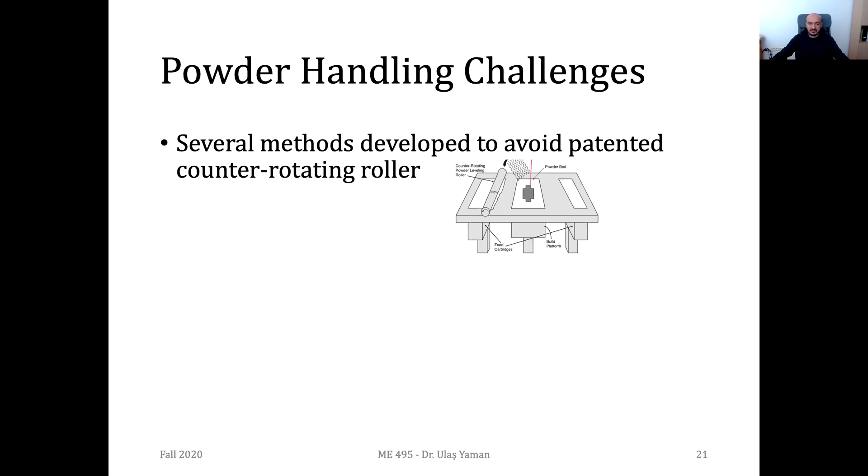What are the requirements from these powder delivery systems? First of all, you need a reservoir, a kind of powder tank, which has sufficient volume. Can anyone tell me the requirement for that? Any relation between the volumes? If you have two feed cartridges here and the build platform, what is the relation between the volumes of these regions, these parts?

If we add the cartridges together, it should be equal to the powder bed, I think. Yep, that's the main thing. If you have a volume of powder bed, then you need to have that material volume in these cartridges. If you have two of them, you may have half of it here, half on the right hand side. This is the main simple requirement for the reservoir, since in the maximum case, your part may fill the complete building bed.

Another requirement about delivery systems is the correct amount of powder on the layers. This is highly important since if you have incorrect amount of powder on the layer, then your laser will not be able to do the sintering.

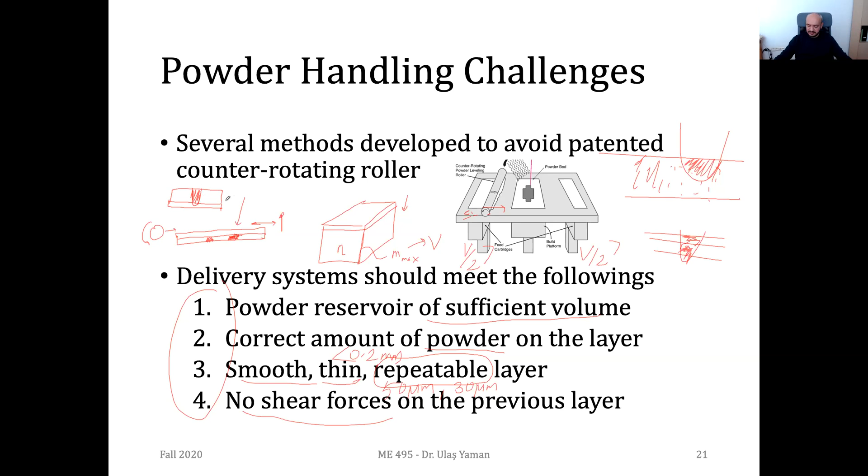But as I mentioned, due to quality and stability problems, most manufacturing companies do not let users play with these layer thicknesses or other laser power issues. Any other questions, guys?

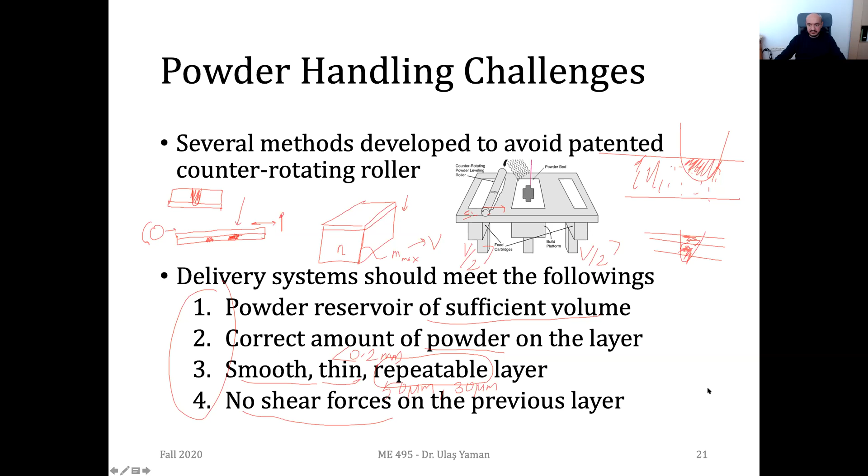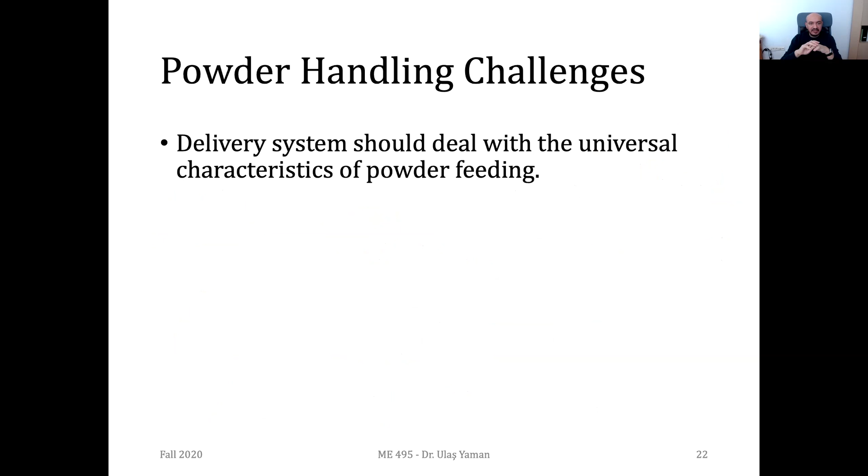Yes, what are the challenges? We have some challenges. Obviously this is not an easy task - you need to be careful while spreading these powders uniformly, and your system should satisfy these requirements. Also, some universal characteristics of the powder feeding system should be considered.

For instance, if you have smaller particles, as the size of your particle decreases, think about flour, okay? If you have smaller particles, then you'll have more friction, more interparticle friction between the powders, and there will be more electrostatic forces, and these will result in a decrease in flowability. So we have an advantage of smaller powders, since if you use smaller powders, your accuracy and resolution will be much better.

You can fabricate highly detailed products. But the thing is, while spreading the powder you may have problems, since the flowability of smaller size particles is very low, due to the fact that we have more friction between them and more electrostatic forces. So we need to find an optimum value for the particle size and try to avoid such problems.

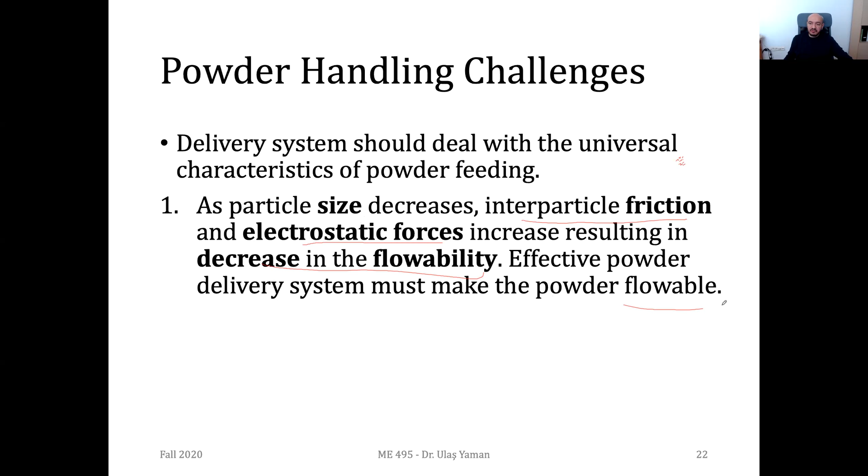So in summary, you need to have flowable powders. Another thing is, if you have more surface area according to the volume, and this ratio is high, then our surface energy will be increased, and the powders will be more reactive, which means we may have some chemical reactions that might result in worse quality. So you need to take care of it.

Sometimes, in order to overcome this issue, we have a controlled atmosphere. We will see in upcoming slides that some especially metal-based systems use such vacuum systems - the interior of the machine is in vacuum, and we don't have any gases around. Or sometimes we use inert gases instead of a vacuum atmosphere, pumping inert gases into the machine so that we will not have any reaction between the powders, the laser beams, and the powder itself.

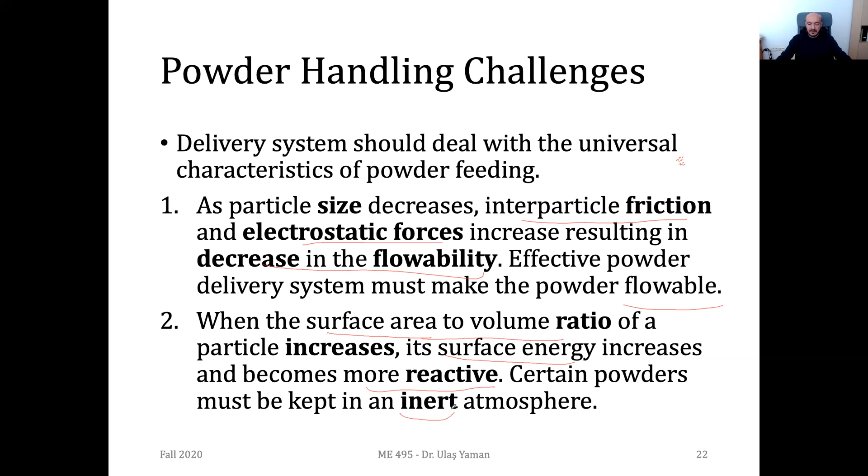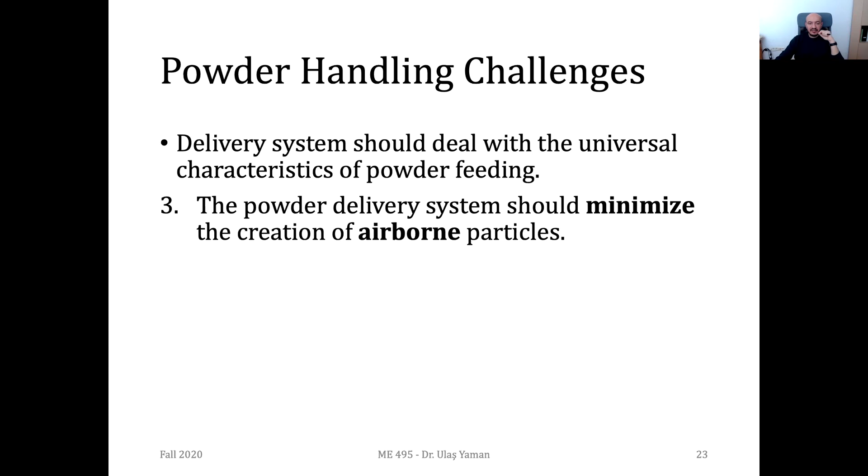Another issue: your system should be capable of minimizing airborne particles. We shouldn't have any particles moving around, so you should clearly spread the powder without moving any powders around. That's another requirement. Lastly, if you have smaller particle sizes, your surface quality will be better, your accuracy will be higher, and you will have thinner layers, which means the staircase effect will be somehow eliminated. You cannot completely eliminate it, but it will be quite difficult to see on inclined planes.

In summary, you should try to use minimum size particles while overcoming the negative effects of such powder systems. This is a quite challenging problem. You should always do some kind of tests on your material and try to find the optimum size for your powder bed fusion system. Any questions on these powder handling challenges?

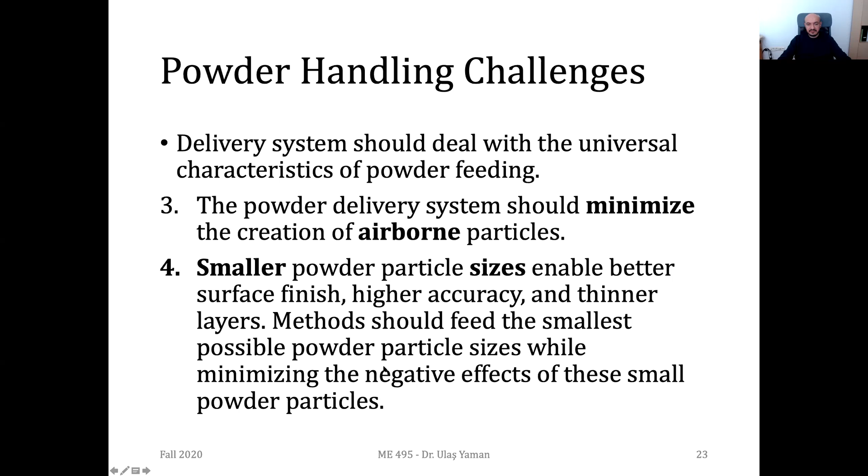So with our powder handling system, we have a counter-rotating roller and feed cartridges. These feed cartridges move upwards and provide extra powder around. Then with the help of this counter-rotating roller, we spread them on this table uniformly. Let me draw the side view. We try to have a uniform amount of powder on the bed all the time.

We always have some powders around this bed, right? We cannot eliminate it. Sometimes you may have a kind of gap, and these extra powders might be stored in recycling units. Once this roller is on the right-hand side—it will be difficult for me to draw, but let's try—once it's on the right-hand side, this one will move up. We will have extra powder, and then by simply moving our counter-rotating roller to the left-hand side, we will spread the powder. This is for decreasing the fabrication time.

You may have a single cartridge, but that will be a time-consuming case. By having 2 cartridges or 2 hoppers, we can save time while printing the part.

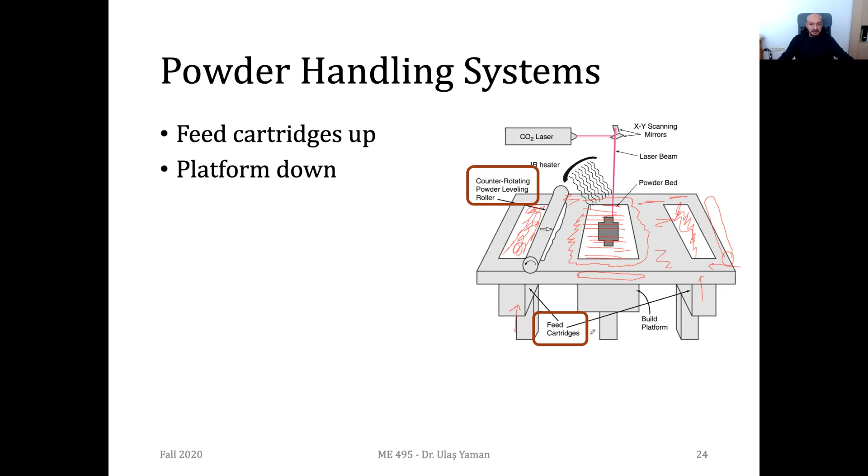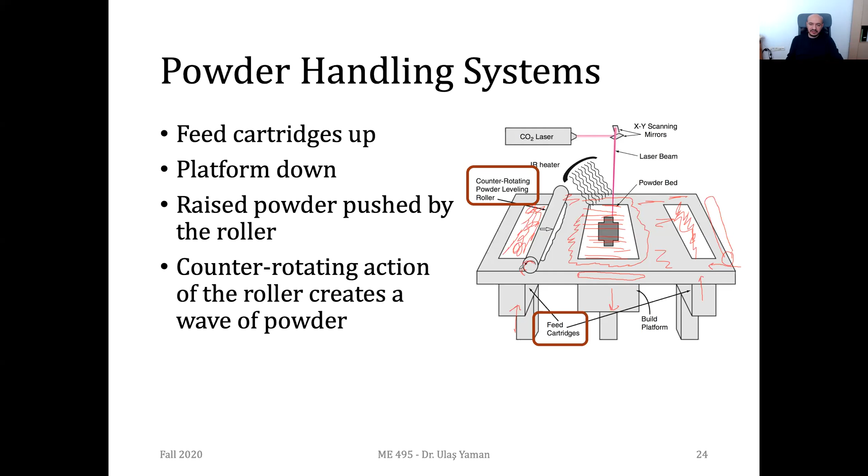While these cartridges are moving up, our platform should go down by one layer, and this powder will be spread by the roller. This counter-rotating roller motion is a very nice feature. By having this, we can obtain quite uniform layers. Another advantage is that we will have less shear forces. It's a cylindrical part rotating around itself in the counterclockwise direction, and it always decreases the shear forces. You will see in a moment that other types of powder handling systems will have more shear forces on the previous layers.

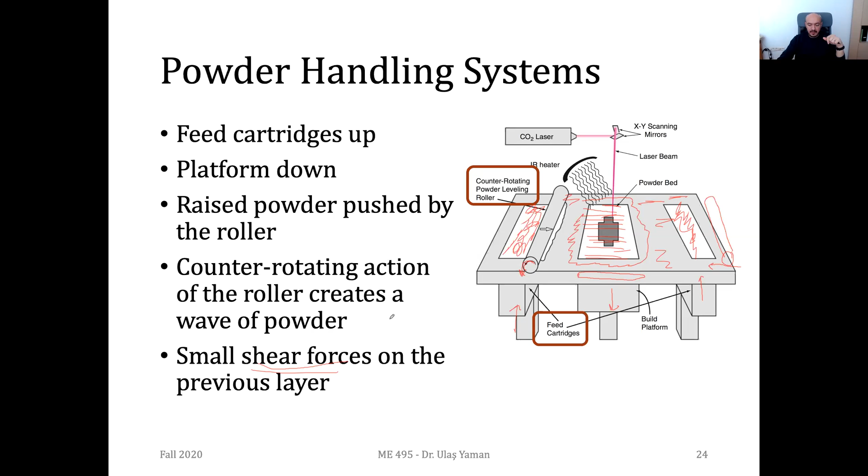Now I will show you an example. I recorded this in Izmir at a company working on a selective laser melting system. They have a kind of inert atmosphere inside since they are using metal powders. On the left-hand side are the cartridges—this one moves up, and this is the build platform, which moves downwards. The size is not much; as far as I remember it should be around 5 centimeters. The diameter of this cylindrical shape is 5 centimeters. Let's see it.

As you see, they are using a kind of doctor blade for powder handling, not a roller or counter-rotating roller. This one moves a little bit, and then the blade takes all these powders and spreads them on this region.

Now, as you see, we don't have any melted particles. Now the laser will work and try to join these powders together. Do you see the laser? I think here it's not that difficult. Now one layer is formed, and this doctor blade will move to the left.

By the way, they didn't have 2 cartridges—they just used a single one. But instead, in order not to have shear forces while moving right to left, they used a kind of tilting; they were tilting the blade.

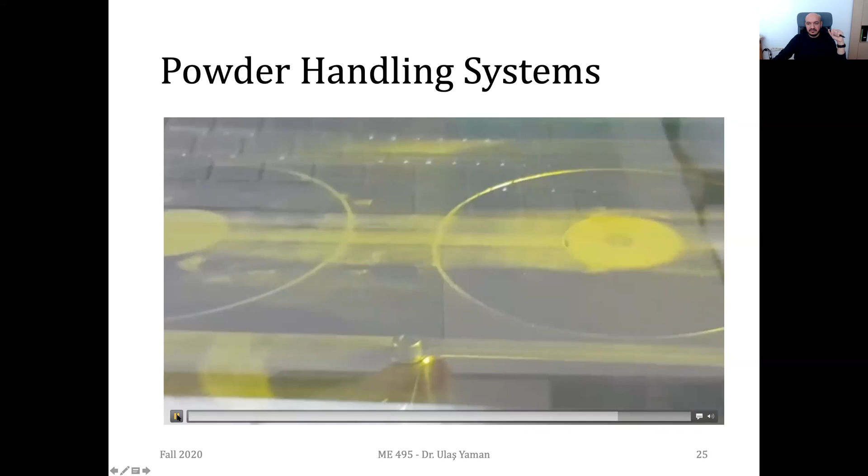Any questions, guys, about this powder handling system?

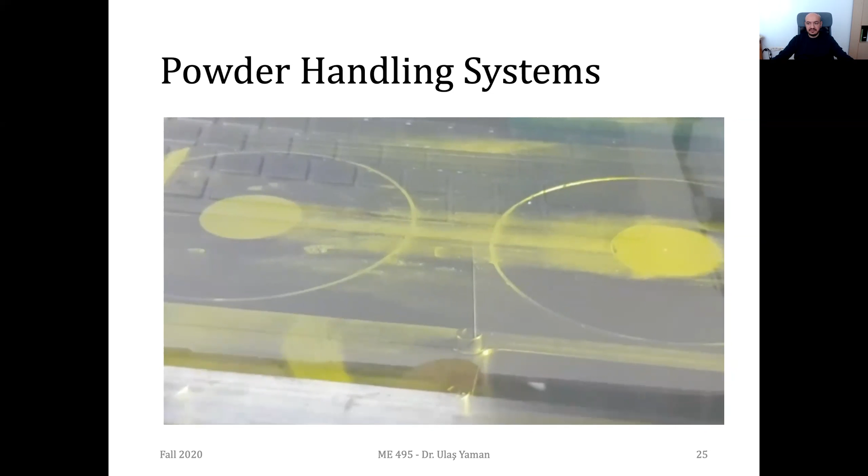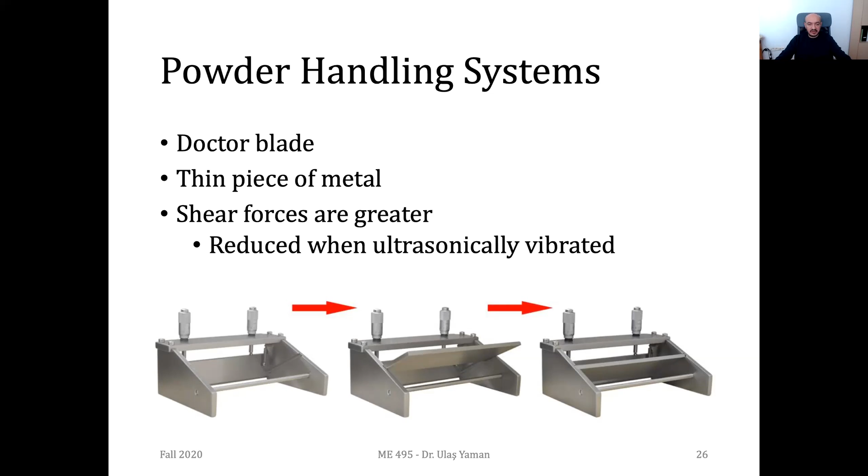This is the mentioned doctor blade. It's a very simple system, but quite useful. As this one is moving to the right, with the help of a simple hinge here, it spreads the powder on the table. Compared to the counter-rotating roller, this has higher shear forces, but you can decrease it if you have some ultrasonic vibration around. You can do it also with such little vibrations; their amplitudes are not much, but the frequencies are higher.

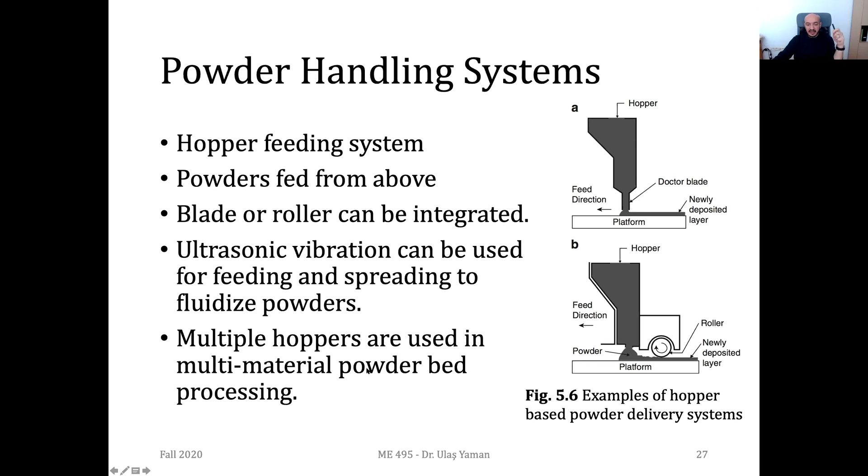Another issue about these hopper systems is that you may have multiple hoppers. One hopper might be responsible for a specific material, and the other hopper may provide you secondary material. So that might be a nice solution for obtaining alloys.

And we have another issue regarding the powders. Since they are quite expensive, it's better we do some recycling. Another issue for the recycling is that we are performing our fabrication in a bed, right? Let's say this is our bed.

Even if you are simply printing such a longer shape, even a simple one, a very low volume part, you need to fill this bed with powders. This is actually the biggest disadvantage of these powder bed systems, and that's why companies are always waiting for more parts to be printed. They do not print a single part in a single bed; instead, they usually have many of them at the same time.

Their advantage is that they can put parts on top of each other. Since we said you don't need to have support structures, you can easily place such parts on top of each other, even though they require support structures, since the powders around will act as a support structure. You don't need to have special ones. This is the main advantage, but the thing is that if you want to print a single part, then it's not meaningful, since you'll waste lots of powder.

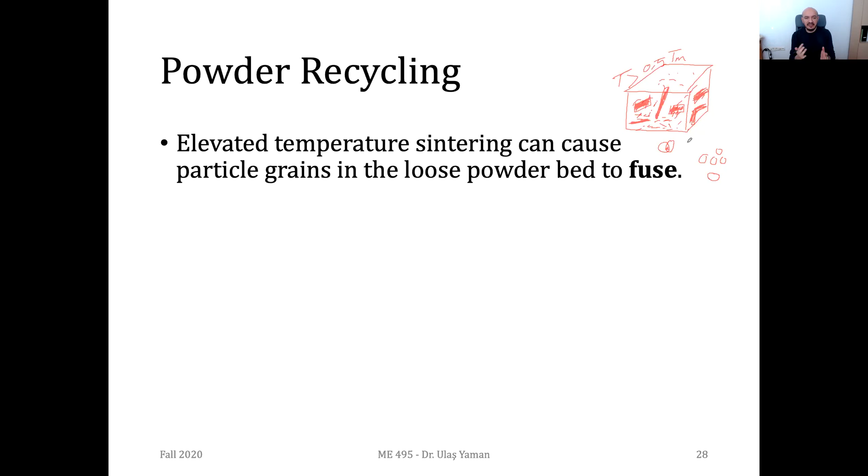Instead, we mix these recycled powders with new powders and try to obtain a uniform mixture, and with the help of it, we try to increase the strength of our parts.

Additionally, not just the temperature, but the atmospheric gases may also do the same. They may cause such reactions, and these particles may be fused together. Another issue: if you have temperatures higher than this value, the molecular weight of the polymer will be modified, and they will not have equal properties with the raw particles.

So what we do is use some ratio. For instance, in our textbook, they say you may have 1 unit of recycled powder and 1 unit of powders on the bed, as powders in the machine.

But this is quite difficult to obtain. You may have some special equipment, vacuum systems, and with the help of them, you can gather these powders around the machine. So they say that you may have 1 unit of recycled, 1 unit of powders from the machine, and 1 unit of new raw particles. If you have such a uniform mixture, they say the quality of your part will be quite okay, and you can save some money by using these recycled powders.

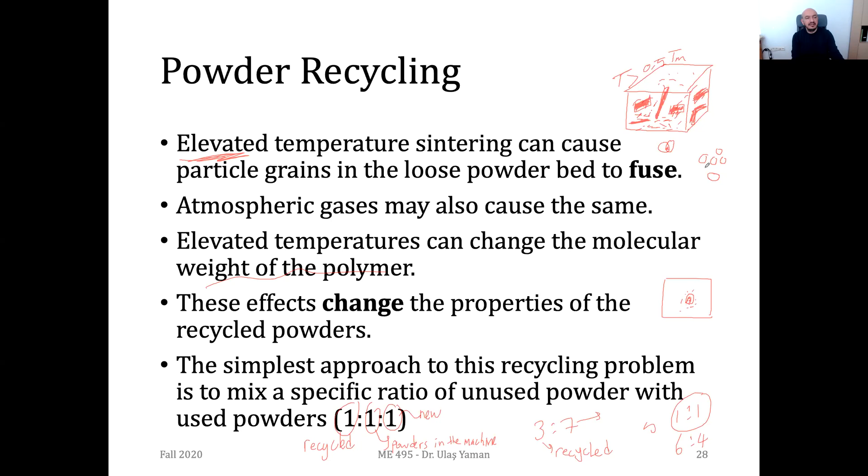That's why they use a kind of screening system to remove powders with larger diameters. Instead, they want to use the same diameter, even if recycled. Otherwise, you will have non-uniform layers, and that will result in big issues.

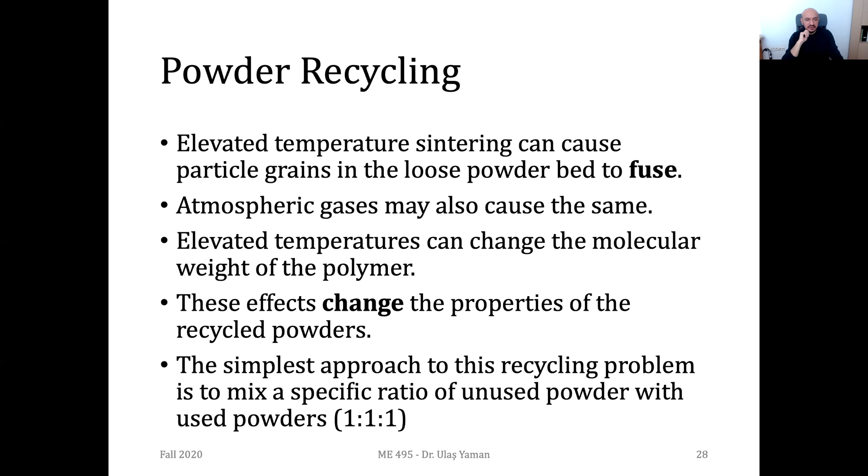Yep. Do you remember the videos I showed you? They are first using... let me show them once again.

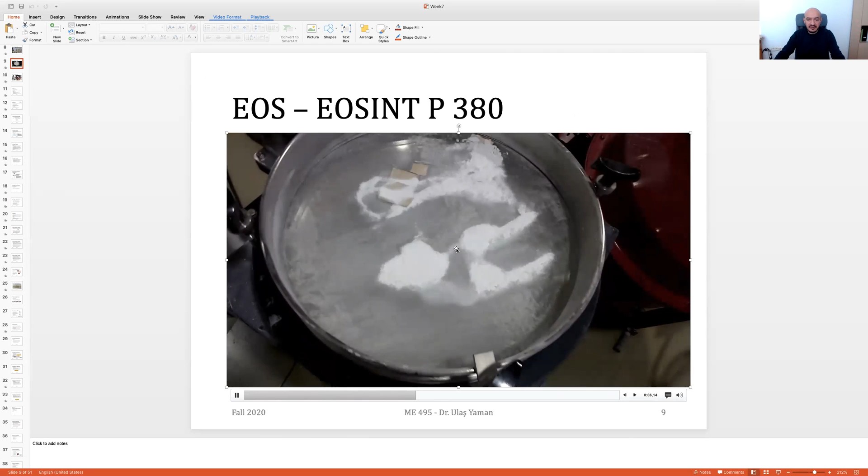Yes, this is the first thing. Actually, they are using screening. It's vibrating, and the particles having larger diameters will be on top, but the remaining ones underneath this screen will be utilized. First, these are joined, let's say, powders.

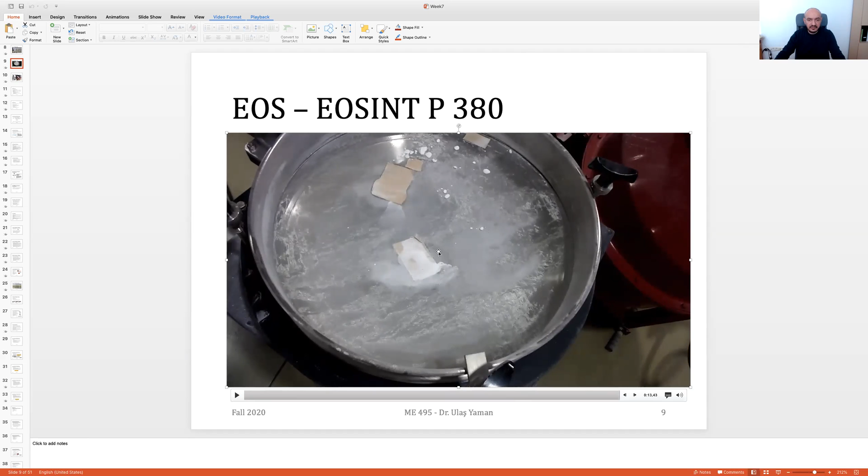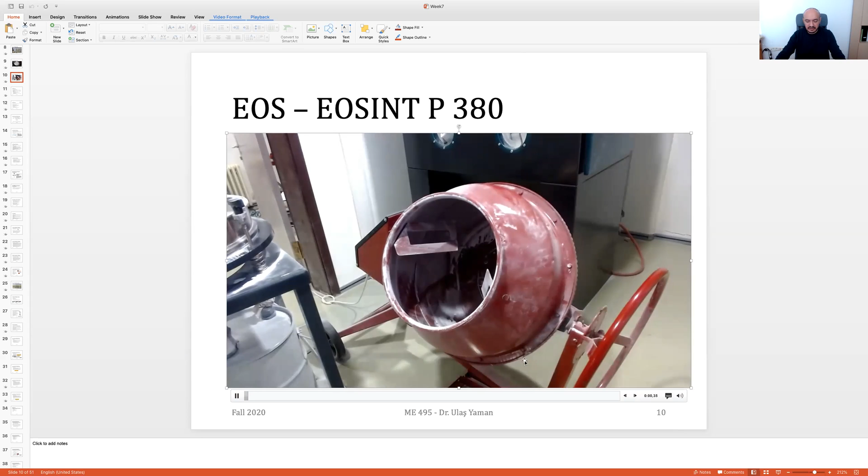You cannot use them directly in your printing operation. After you have this recycled powder, in the second step you put all these recycled powders and new powders into this mixing system. With the help of it, you can have a uniform mixture. This is a mixing system of powders. They mix the unsintered, unused powders with the new ones, so that the quality and strength of the new parts will be better.

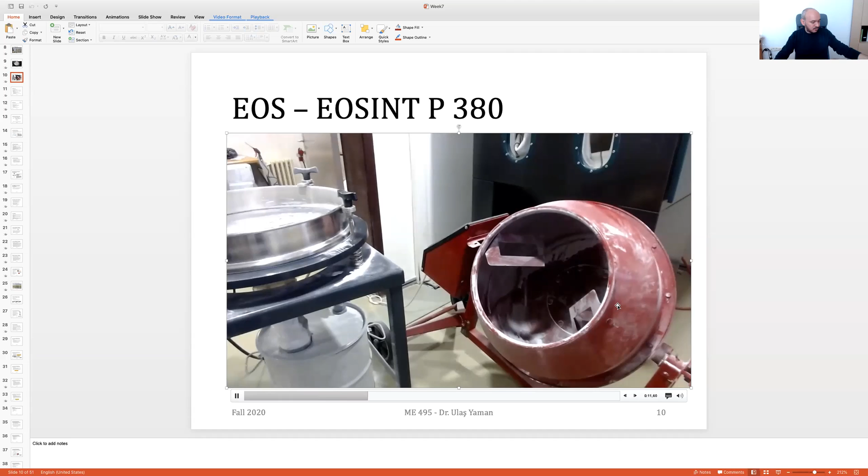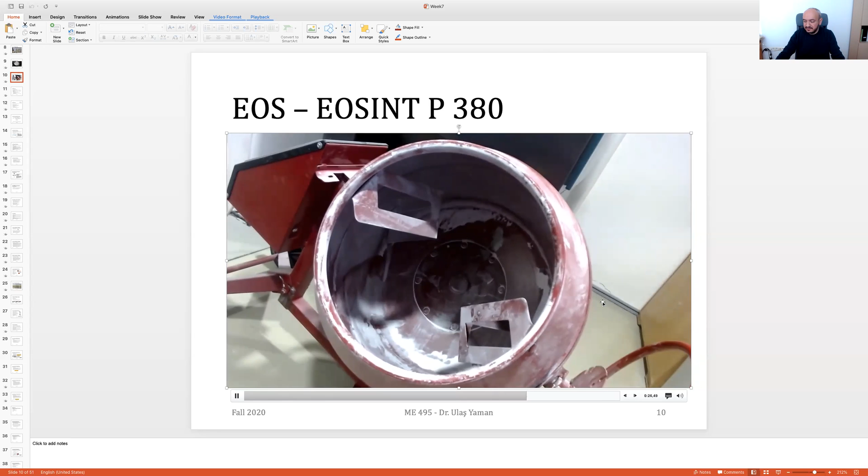They don't want to use completely recycled powders in the new products. Otherwise, it will be a bit brittle and probably have less strength. So they use a kind of mixture, usually around 30% of the powder from the recycled ones, but 70% new powder.

Okay, any questions?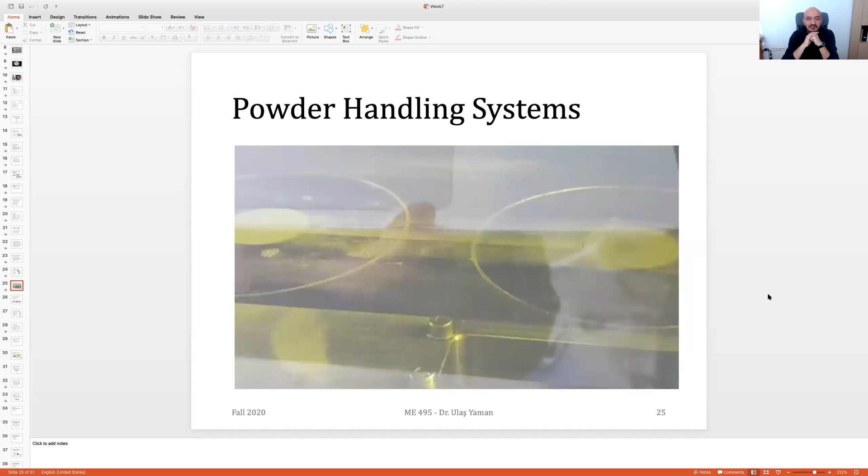Yes, but it's quite difficult. I was also thinking about that issue. We focused on some concepts, but we didn't come up with a feasible solution. If you can find such a solution, then we may apply for a patent. This is a nice issue, but right now there is no solution.

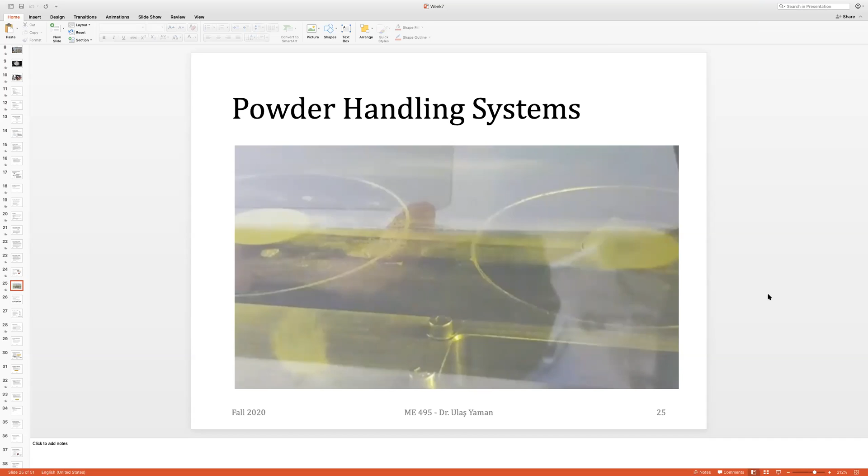It depends on the size of your powder bed. If your powder bed has a volume of, let's say, 10 units, and your part has 1 unit, that means 9 amounts of powder should be recycled, and you cannot completely use them. So it's quite a high number, I can say.

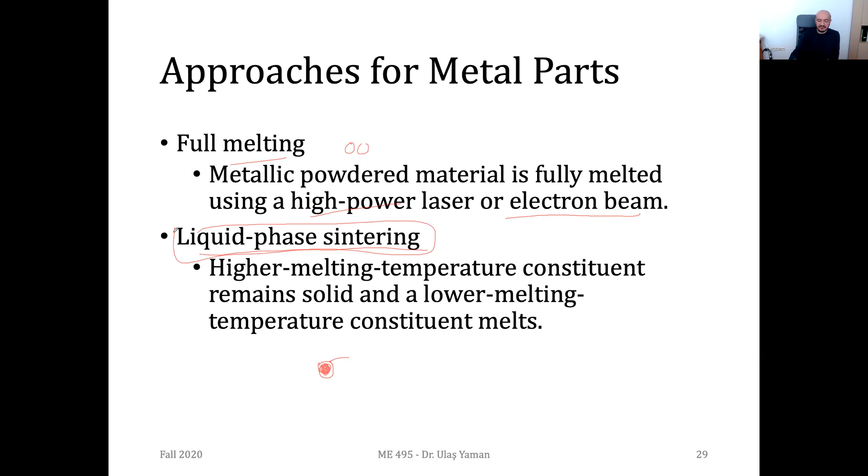So in the printing, you obtain a green part. Like in the case of powder metallurgy, your fabrication will not be finalized. You need to do further sintering, done in a special oven, a special furnace. After the furnace, you will have fusion between your original powders.

Let me try to show you the fundamentals using this company as an example. They were focusing first on composite type printing, but for about two years they also started working on metal products. Their system is called Metal X, and they somehow use this fundamental approach. Let me show you.

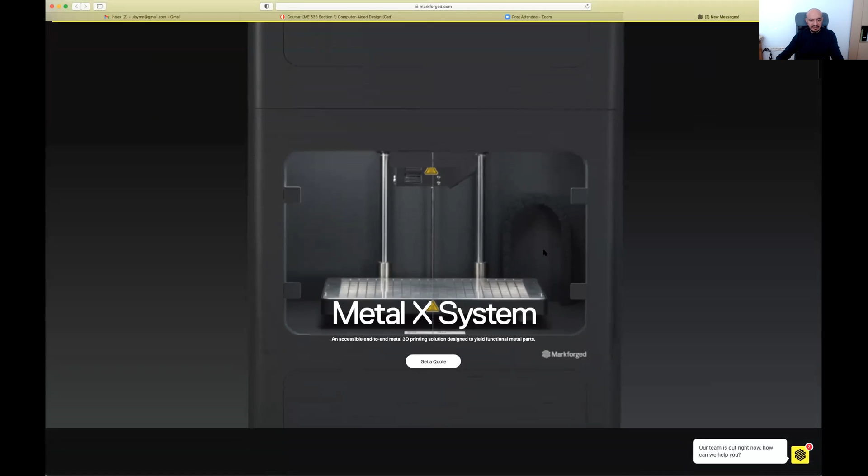So this is their system, let me see if they have any other information. Yes, you see after the part is printed, they need to do some washing and extra sintering. In washing, they try to remove the powders around it and then do the sintering. But what happens in the sintering part is that the part shrinks a lot, usually around 25% or so. So in their software, they first do a kind of enlarging scaling operation, and once this secondary sintering operation is finalized, you obtain the desired sizes.

These days they are focusing on copper. They obviously work on steel too, but I think their new research is mostly on copper material. These are some example products they obtained with their system, and you can see they are also working with difficult metals like Inconel and some superalloys.

You can have a look at them. They also work with steels, obviously. Let me see if they have any other information.

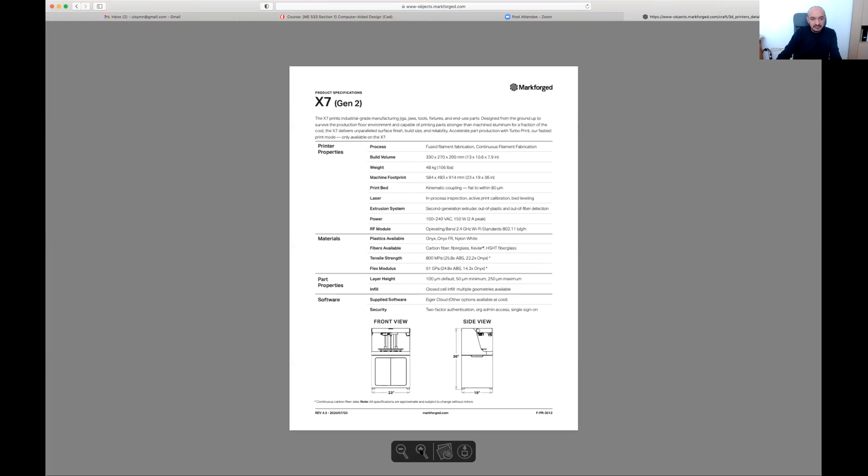Let's have a look at their latest product, the X7. I'm looking for a video, but I think they don't have one. Or let's have a look at system details - not this, I may talk about their data sheet, but this is not the thing I was actually planning to mention. So let's switch to our slides.

Okay guys, do you have questions regarding this fundamentals about metal parts, fusion of metal powders?

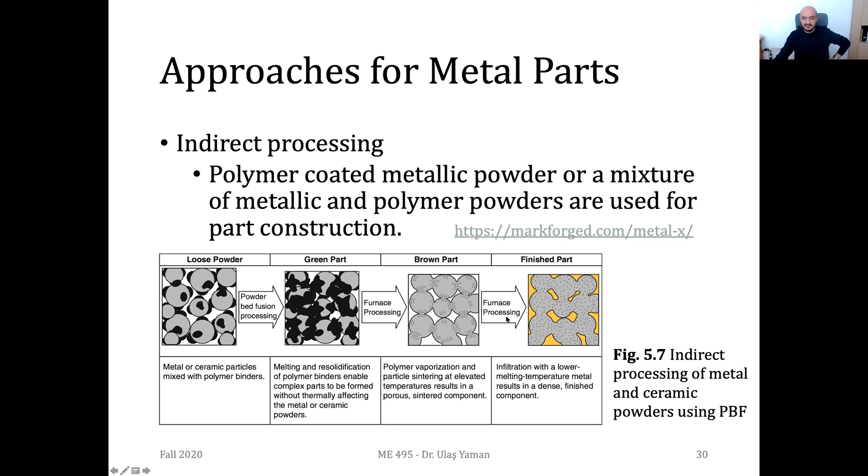Another case where you can make use of such powder bed fusion systems is to obtain the pattern, and now I will show you an example. They are using a powder bed fusion system to obtain molds for casting operations, sand casting operations. So their powders will be sent, and at the end of their process, they will obtain huge molds, and with the help of it, you can do casting operations. Now I will show it to you in a moment, but we have an advertisement first. Any questions, guys?

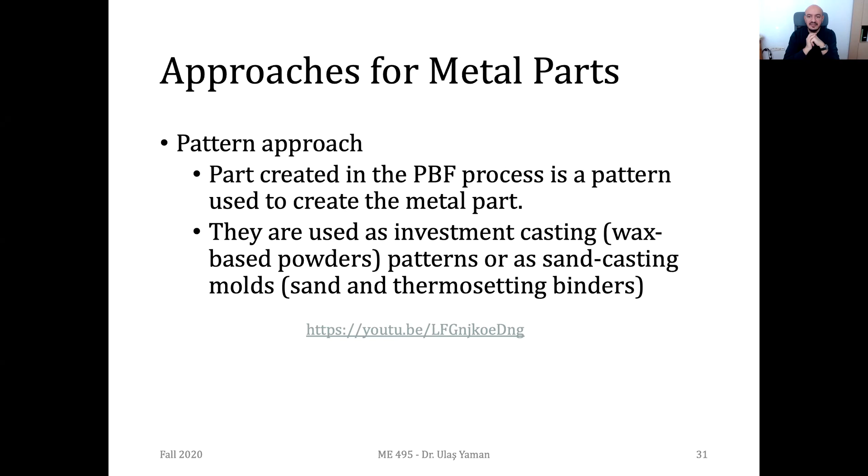Now I will show you a company called ExOne, and they are producing sand molds for metal products.

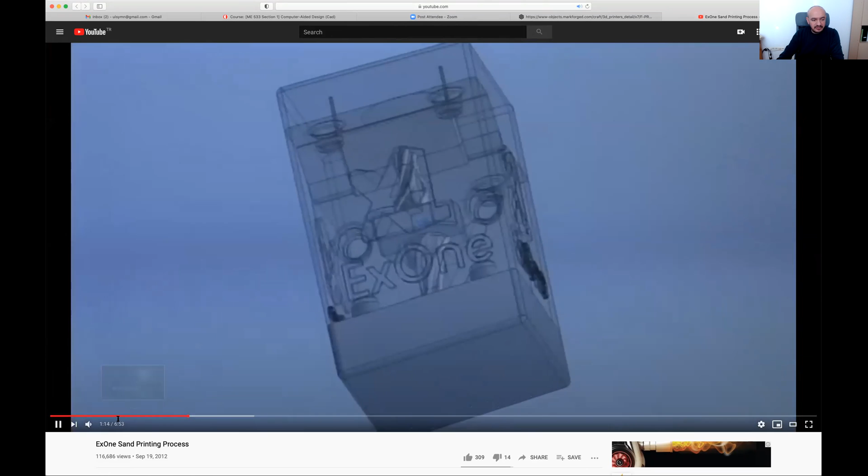I'll skip the fundamentals, they obviously use a similar CAM software. I'm skipping these parts, and since they have a larger build volume, that's why they try to print many of these molds at the same time.

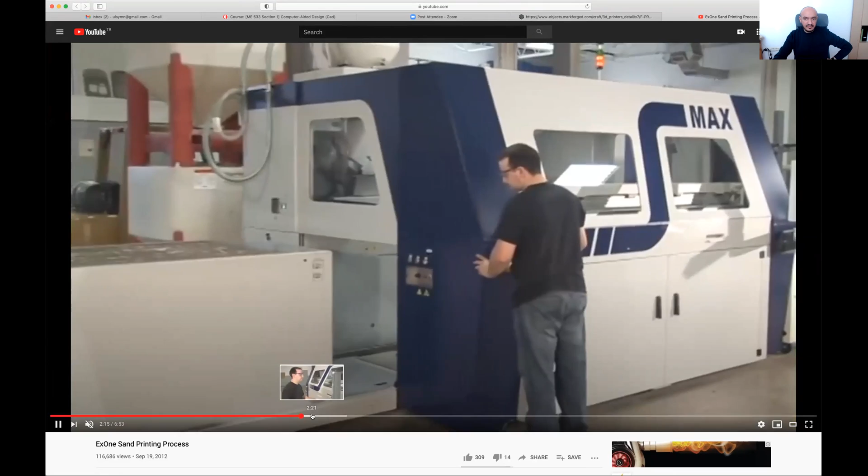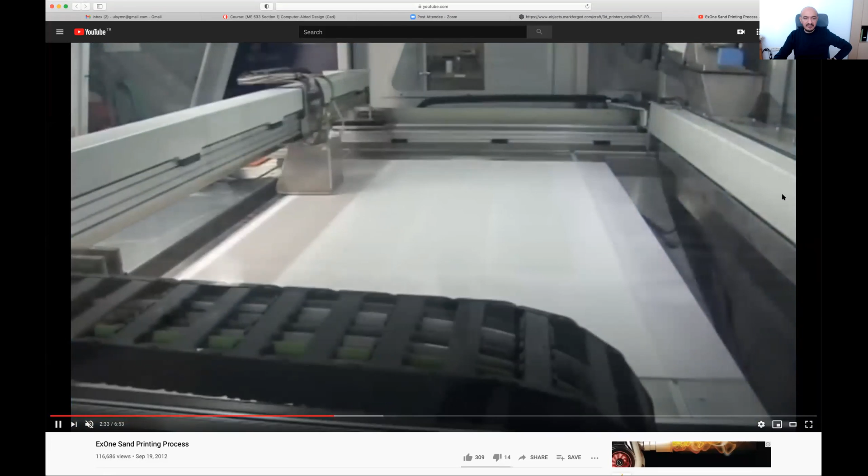So this is their huge machine, huge printer, and they are only using sand. At the end of the process, they will have a sand mold. This is their sintering head, it's moving, as you see, kind of scanning the plane. If you have a look at this table, clearly you can see the sintered regions.

Another layer, now they will spread some powder. This is their kind of hopper, I guess. Now it's sintered. Another sintering operation. They are not obviously melting the sand particles, they are just joining them together.

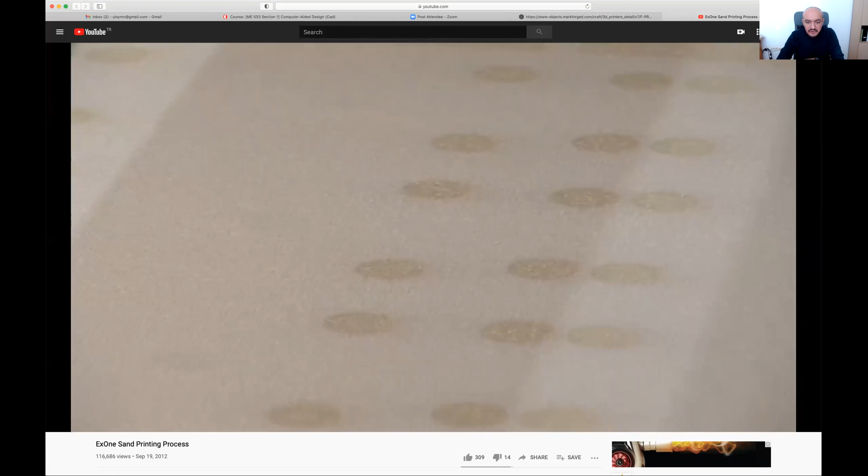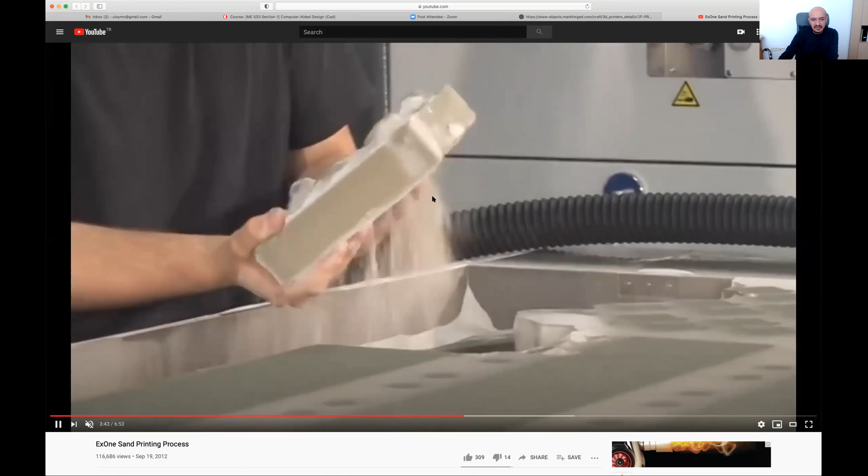Now the cleaning part, they are trying to recycle the sand, as you see they have a kind of vacuum system. This is their powder bed. Yes, now this mold, one part of the mold, is ready. It's quite brittle, so they should be careful.

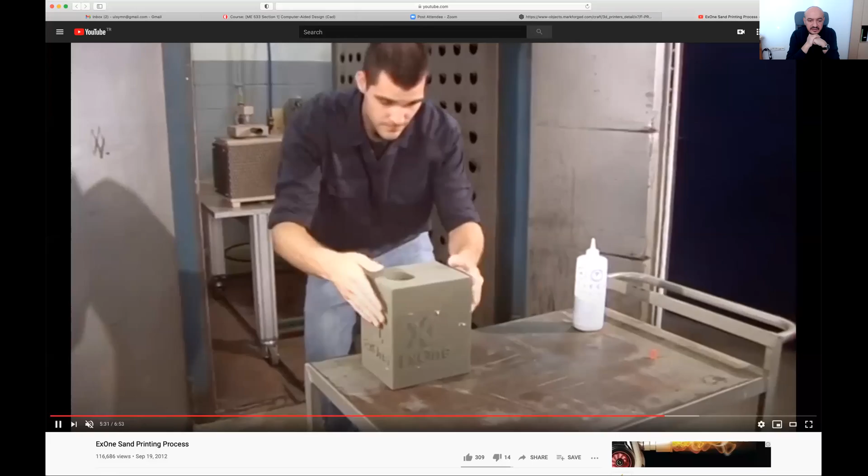Now the parts are going to be cleaned with the help of such an air jet. Now they are joining the mold parts together by using such glue. So this mold has, I think, 4 parts, which is quite difficult to obtain with conventional approaches, that's why they used 3D printing to obtain the mold.

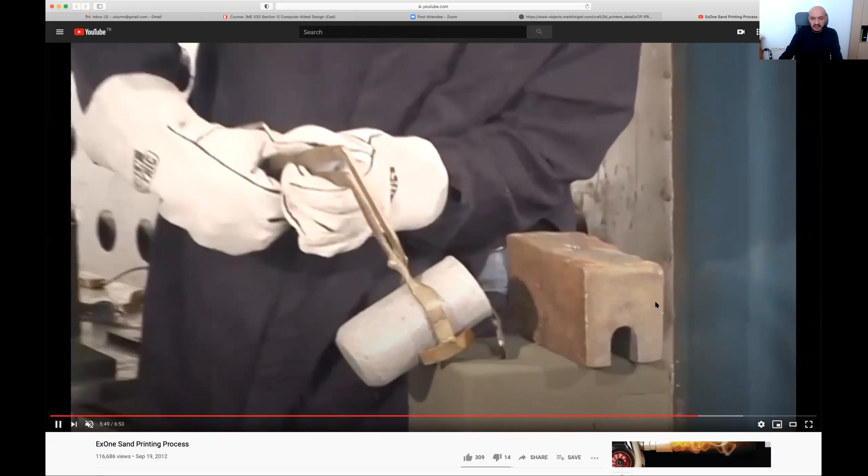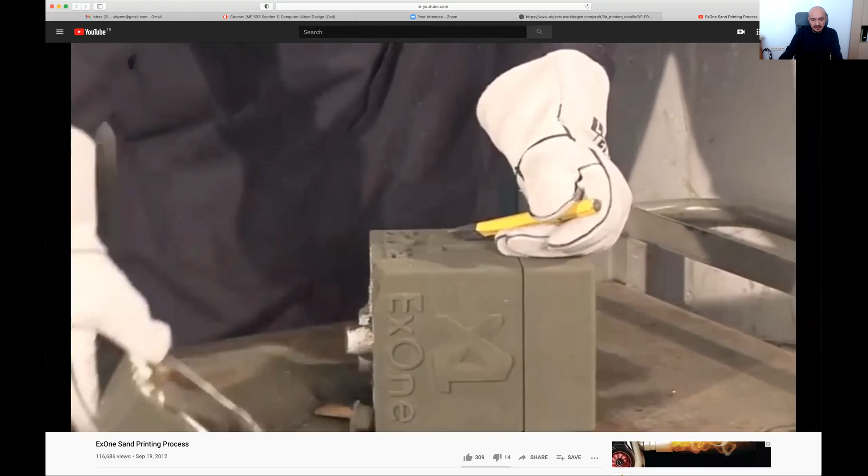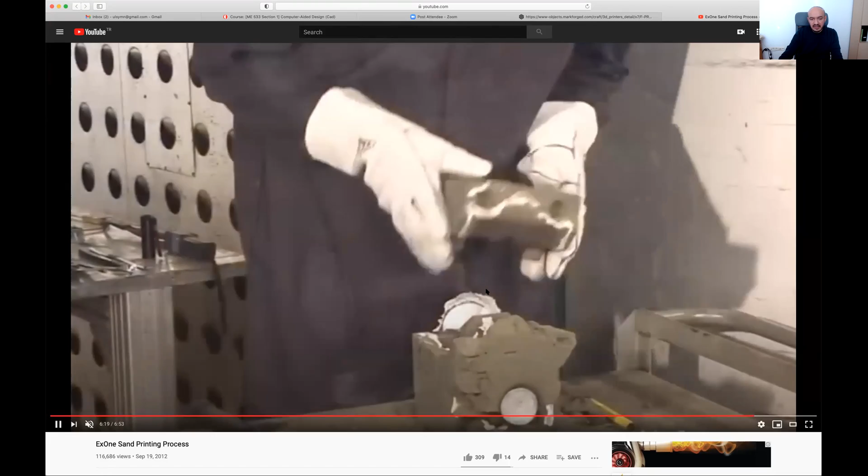Now they are doing the casting operation. After it's solidified, they will simply remove it, and they will not be able to use this mold once again, since this is an expendable mold. That's why they actually printed many of them at the same time. Now you'll see that it's a quite complicated product, which is not possible to do with single or double molds.